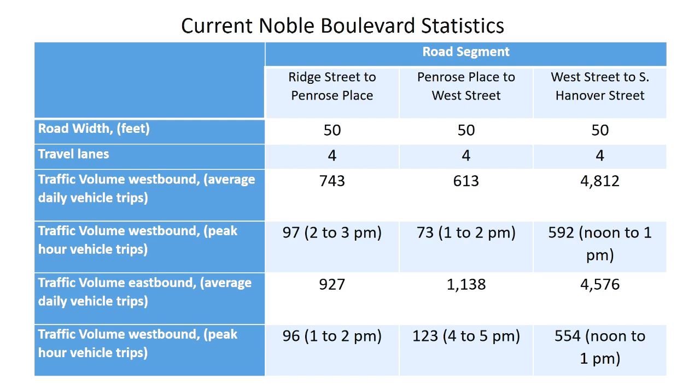So the stormwater master plan that we're working to finalize recommends that council look for opportunities to reduce the amount of impervious coverage tributary to Walnut Bottom Road and South West Street.

Recognizing that, what we're suggesting to council is that when we go through the road repaving, road resurfacing project this year, that we make a number of changes to that corridor. The first of which is to reduce the number of lanes west of West Street from the current 4 to 2 travel lanes, and

convert the 1 travel lane on the extreme southern end of Noble Boulevard to a vegetated lane, essentially. So remove that bituminous concrete, replace it with soil and plantings, similar to what was done on Factory Street last year. On the north side, then, the 2 existing lanes would be converted to 1 travel lane, and a proposal to make it a dedicated 2-way bicycle lane.

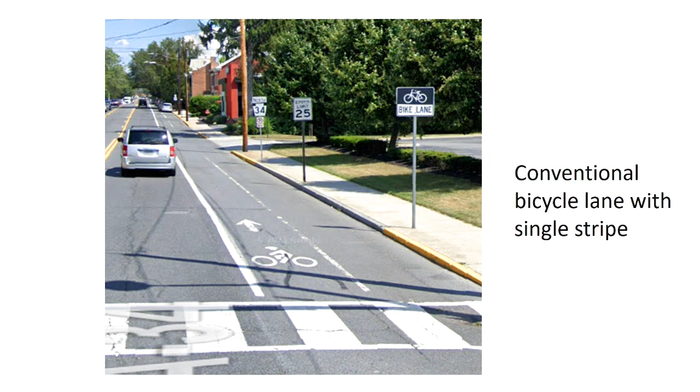Noble Boulevard represents a connector between an off-road bike network on the east side and one on the west side, so that it would be a good candidate to enhance the biking facilities that are there now. If you go to the next slide, there are a number of bicycle lanes that could be put in place. The first photograph here is of South Hanover Street, right near the Rite Aid, and it has a conventional bike lane with a single stripe and a bicycle character there that provides some space, but hardly any protection.

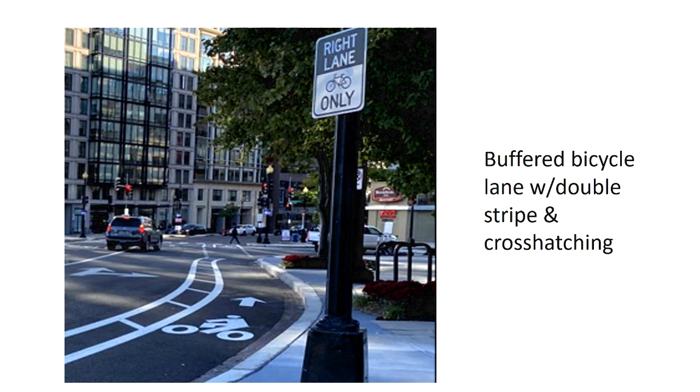If you go to the next one, next level up, there's a buffered bicycle lane that has not one but two stripes and a wider area between the travel lane and the bike lane. I believe that this photograph was from the Washington D.C. area. If you go to the next one, this is an additional level of separation. This has the buffered with two parallel bars, but there is also a flexible vertical post delineator that would go within that area to again designate that as a biking lane and provide an additional level of separation between folks traveling in cars and folks traveling on bikes or other

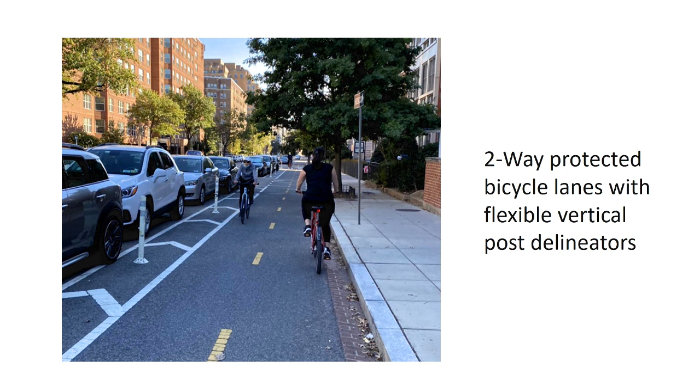pedestrian powered. The final one has, in addition to the vertical post delineator, also some type of concrete bumper structure. The concrete bumper structures shown in this photograph are similar to what you would find in a borough parking lot where you want the vehicle to stop and not go any further. Obviously, when you go from the conventional to the next level, the cost investment by the borough increases, but also the level of protection to anyone using that infrastructure increases as well.

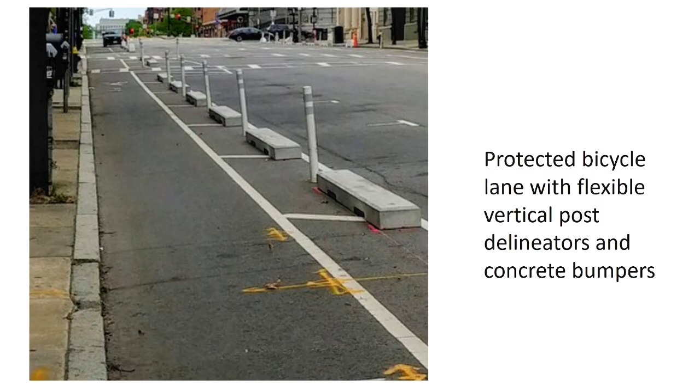If you go to the next slide, these are just some schematics showing the area between Ridge and Penrose on the south side. There's currently 4 lanes there. We're proposing to convert that to 2 travel lanes, with the existing southern travel lane being converted to a vegetated strip that would require removal of the existing macadam and construction of a new curb. But in the process, you save the amount of bituminous concrete that you need to put down from now through any changes made to the roadway. And on the north side, a 2-way bicycle lane; this shows just a buffered double stripe. There are existing driveway entrances on the north side, and those would be marked by a special marking to indicate that a vehicle

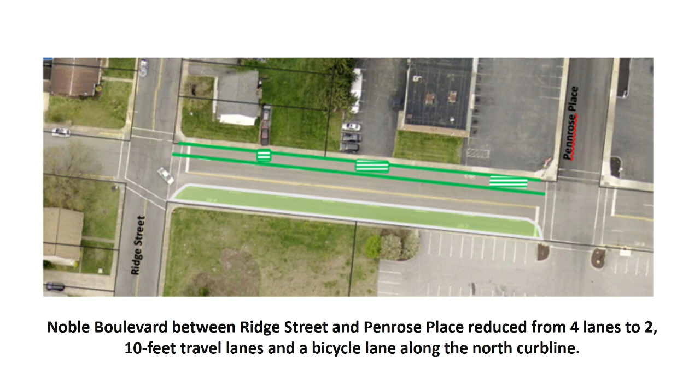can drive into those. If you go to the next one, this is between Penrose and West, and similar treatment here to what is proposed for the area between Penrose and Ridge, where it's a vegetated swale on the south side and a 2-way bicycle lane on the north side.

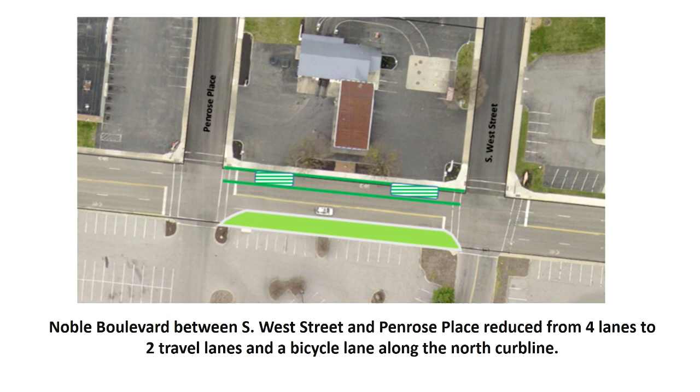And then final slide, the area between West and South Hanover, we would not make any changes to the amount of paved roadway there, so it would continue to be 50 feet in width, but what we would have is converting the 4 vehicle travel lanes to 3 vehicle travel lanes, with the center lane being a turning lane, and the fourth lane being a two-way dedicated bicycle lane on the north side of the roadway, so that the predominant turning here is folks turning into Carlisle Commons. So putting the bicycle lane on the north side reduces the number of potential conflicts there between a motorist and a bicyclist.

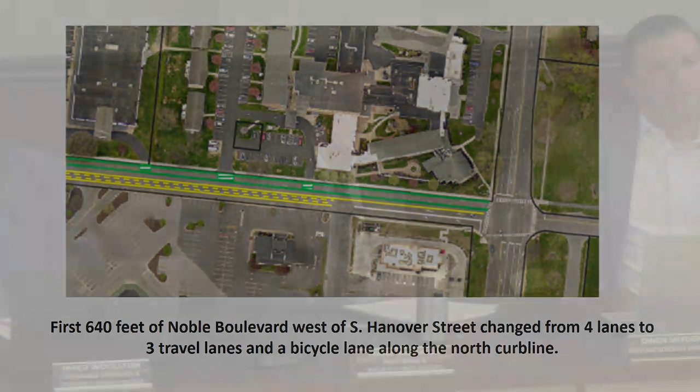The approach to the signalized intersection at South Hanover and Noble would be similar to what it is now, with two lanes heading eastbound, one a dedicated right turning lane, the second a throughway or left turning lane, and then the other two lanes would either be a westbound travel lane or the bicycle lane. We do experience a lot of problems at this intersection with cars and trucks and other vehicles turning prematurely onto the sidewalk and the pedestrian curb ramp there.

That has taken down our traffic signal utility pole several times. It's also taken down PPL's utility pole several times. Currently, if you go down there now, it's extremely dark, and the reason it's extremely dark is there was an accident and someone hit the pole, and the two lights that were there came off. So by making this change and having that be a bicycle lane, that pushes the vehicles further out and eliminates the potential for continued hitting of those utility poles in the future.

Next slide. Oh, that's it. So the last part of the memo has some estimated costs there for comparison, just keeping the road the way it is now, and how much that would cost for the paving versus reducing the number of lanes and putting in a dedicated bike lane. And you'll see that there's obviously an increased upfront cost for the additional bike lane, but it's a relatively marginal cost, and if you would go through a life cycle analysis, it probably would get closer and potentially equal out over time.

So I echo what's been said, that something definitely needs to be done. My one concern is there's no turning lane into the Chick-fil-A/Panera entrance if you're coming from Hanover Street. And so I'm wondering, when you did the traffic study, and yes, it's definitely much more heavily used between Hanover and West, how many of those cars are turning into Chick-fil-A and how many are turning into Walmart? Because at the Walmart, that weird diagonal entrance, you do have a turning lane. I'm wondering if having no turning lane there might cause a backup to the Hanover Street intersection.

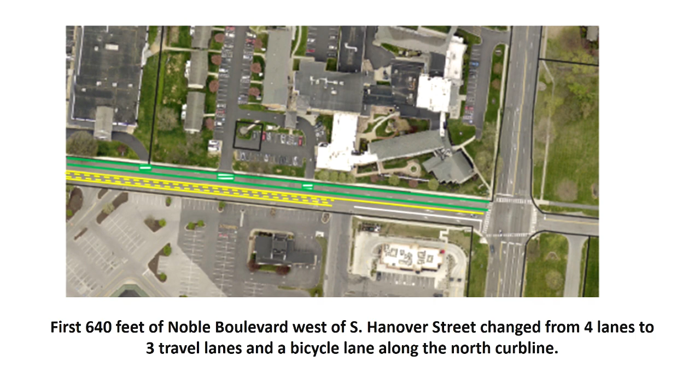Yeah, so we did not yet collect data at that private driveway. We intend to do that. The center lane: there would be 3 travel lanes, and the center one is intended to be a center turning lane, so you could turn either right or left. It's a matter of the amount of vehicles that are queued there. So if you go during peak hour, and for this area peak hour is generally between noon and 1, or 12:30 and 1:30, lunchtime.

There's a lot of vehicles that are backed up, even in the right-hand turning lane, heading eastbound to that driveway, or perhaps past that driveway. So, the intent would be that the middle lane could be used for either, but there potentially could be situations where the queue is all the way back up to the intersection, which is what occurs there now.